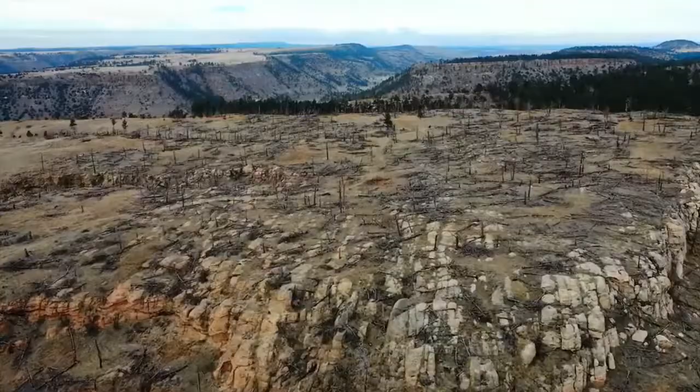The project FIT4REUSE aims at providing safe, sustainable and accepted ways of water supply for the Mediterranean basin by exploiting non-conventional water resources through innovative treatment technologies on the use of treated wastewater and desalinated water in agriculture and for aquifer recharge, adapted to the Mediterranean context and fulfilling legislative frame and market demands. Reclaimed water and desalinated water contribute to compensate the gap between agricultural water demand and supply and provide consistently high-quality water throughout the year.

FIT4REUSE technologies are developed in cooperation with stakeholders of the Mediterranean region and target practitioners, public administration, constructing companies and water operators through a concise business model, providing guidelines for practitioners and performing a holistic assessment of the use of non-conventional water resources to improve its public and legal acceptance.

The project FIT4REUSE is part of the PRIMA program, supported under Horizon 2020, the European Union's framework for research and innovation. It counts on 9 partners across 7 Mediterranean countries, consisting of universities, governmental organizations, water utilities and SMEs. Particularly, the project concentrates on the development of innovative, sustainable and competitive technologies for municipal wastewater treatment, desalination and brine treatment and disposal, simulation platform, irrigation.

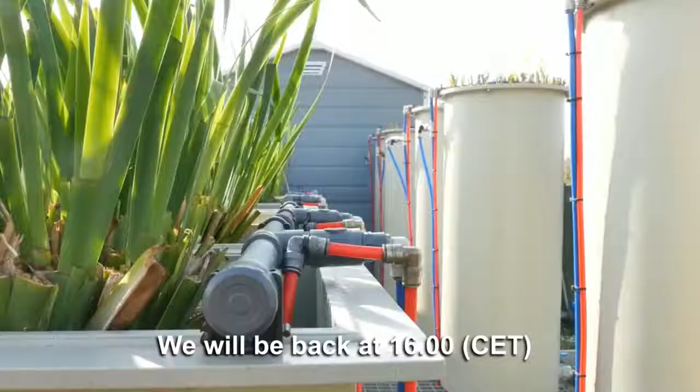The goal of the pilot plant in Granarolo dell'Emilia, Italy, is to optimize and enhance nature-based solutions for domestic wastewater treatment in order to produce an effluent that is suitable for reuse in agricultural irrigation. The pilot plant is located in a small municipality of the metropolitan city of Bologna, and it is intended for the secondary treatment of domestic wastewater through constructed wetland technology. It consists of 12 systems in total, 6 vertical flow constructed wetlands planted with Phragmites australis and 6 horizontal flow constructed wetlands planted with Iris pseudacorus.

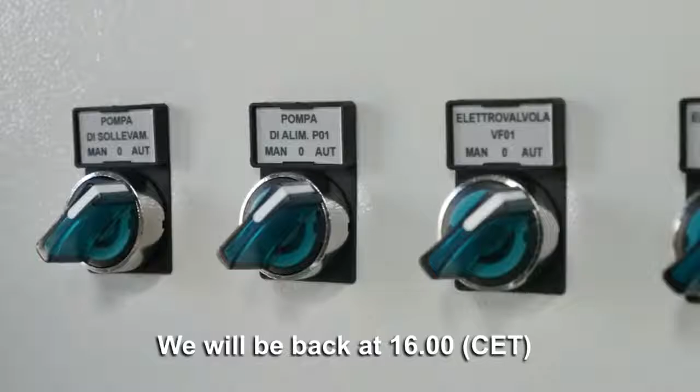These systems will test the contribution of different substrates to the treatment performance, also through their combination in series. Besides, researchers from the University of Bologna will test other operational parameters such as the effect of aeration, hydraulic loading rate and hydraulic retention time on the removal efficiencies of different contaminants present in wastewater. The pilot plant is fully automated and it will therefore allow a more complex monitoring, considerably increase reliability of results and reduce error probability.

The objective of the Greek pilot plant is to produce reclaimed water suitable for irrigation, European Class B or even better, by combining innovative nature-based solutions with nanotechnology. The pilot plant is located in the decentralized municipality of Antissa on the island of Lesbos. It consists of a vertical downflow bioelectrified wetland followed by a conventional sand filter, a novel nano-zero-valent iron column and an ultraviolet unit.

The bioelectrified wetland is an innovative solution for wastewater treatment that combines the advantages of microbial electrochemical technology with those of constructed wetlands, thus providing a number of benefits such as significantly lower land requirements and the potential for energy harvesting. The novelty is that the materials commonly used for wetland construction, such as gravel and sand, are replaced by electrically conductive materials such as coke, graphite and biochar that host electroactive bacteria.

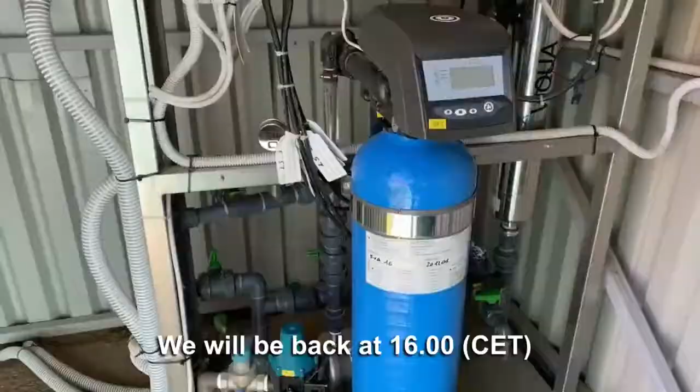Accordingly, nano-zero-valent iron is a powerful reagent with high efficiency for a wide spectrum of contaminants, both organic and inorganic. Its versatility is due to the fact that it can remove or immobilize the contaminants through various mechanisms, such as reduction, adsorption, or even oxidation through Fenton-type reactions. The integrated system has been set in operation and is routinely monitored in order to achieve optimum conditions, thus supporting the production of reclaimed water suitable for irrigation purposes.

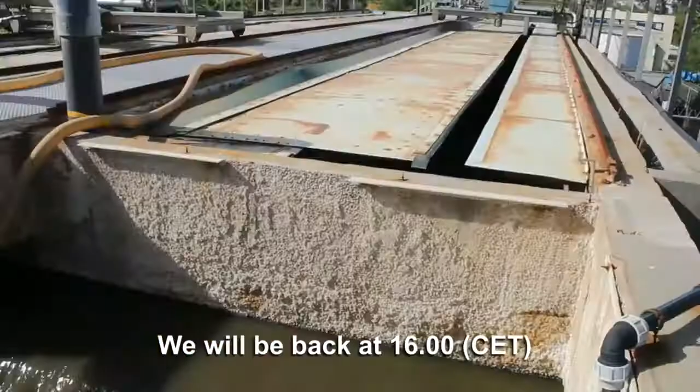Low-cost and energy-saving experimental wastewater treatment pilots have been designed and implemented separately or as integrated systems in relevant environment and run with real wastewater at relatively high flows. The pilot plant, using nature-based solutions as vertical and horizontal constructed wetlands for wastewater treatment, is located in Wastewater Treatment Plant El Menzah. Additional technologies will be combined and integrated in order to enhance the removal of pharmaceuticals, emerging pollutants and pathogens, and to recover nutrients and energy.

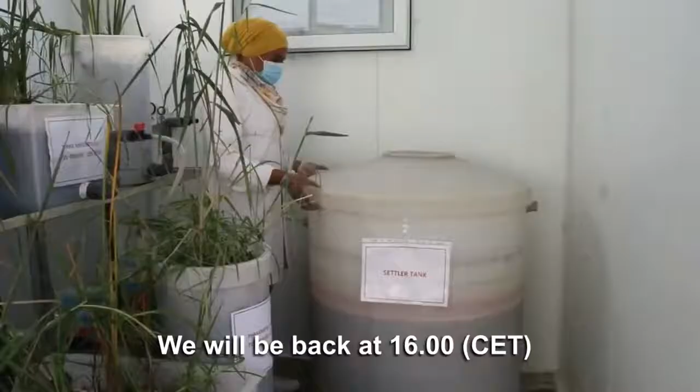Fixed bed adsorption using various inexpensive and natural adsorbents, clay, olive seed, date seed and perlite will be added before the discharge of wastewater in order to enhance the removal of pharmaceuticals and emerging pollutants, for example, bisphenol A and diclofenac. Ozone and UV irradiation technologies to remove pathogenic bacteria will also be assessed. A collection of plant growth promoting PGP bacteria was selected and will be integrated with constructed wetlands to remove micropollutants, diclofenac, bisphenol A.

The upflow anaerobic sludge blanket pilot, an anaerobic process for intensive wastewater treatment, is installed in wastewater treatment plant Chotrana. It is designed to be tested and started up with static biofilter as a pre-treatment stage for total suspended solids and chemical oxygen demand removal. It contains 2 tanks as conditioning tank and UASB reactor assembled as a closed-loop system. The reactor is equipped with an electric heating system to adjust the anaerobic tank at the desired temperature.

The treated wastewater is tested for field irrigation, and preliminary results showed that plant growth was comparable to that attained when drinking water was used without any noticeable adverse effect on the plants or the soil.

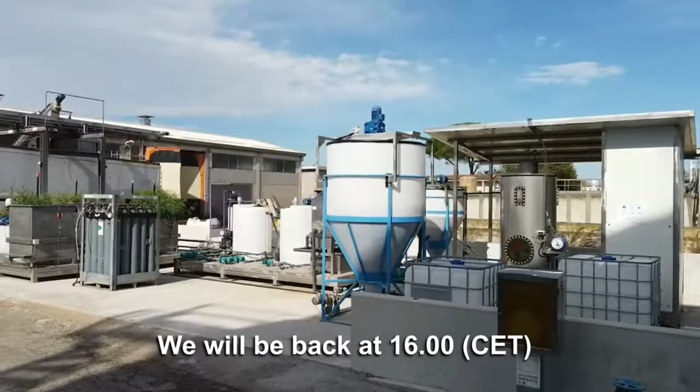The integrated pilot system, combining intensive and nature-based solutions for wastewater treatment, is located in Imola. The pilot activities will be performed on an existing experimental platform recently built within an Italian national project. In this way, the platform will also be exploited for additional and specific studies related to the FIT4REUSE objectives. It can test different combinations of upflow anaerobic sludge blanket, anaerobic membrane bioreactor, molecularly imprinted polymers, single or hybrid constructed wetlands, and ultraviolet disinfection unit.

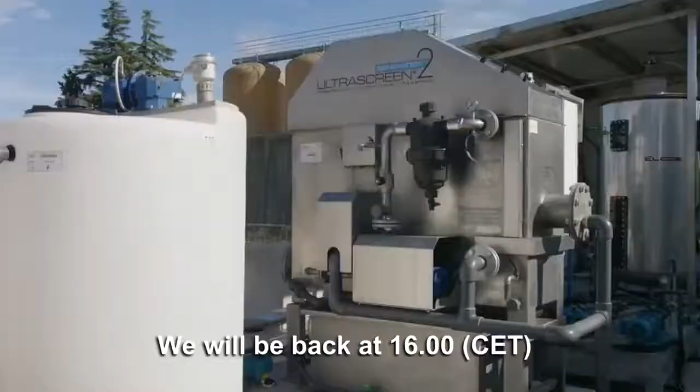These combinations will be used for treatment of real domestic wastewater with an occasional discharge of industrial effluent, and will aim to produce effluent that has a quality needed for irrigation of agricultural crops. Moreover, combining intensive and nature-based solutions is expected to reduce treatment costs, improve removal efficiencies, and make wastewater treatment process more sustainable. Upflow anaerobic sludge blanket can use organic matter to produce biogas, while constructed wetlands are low-cost technology able to further treat wastewater with low energy input.

The pilot plant has a central control unit, also accessible through an online platform, allowing everyday operation and monitoring of its functions. For example, flow rates, biogas production, and other operative parameters can be constantly monitored.

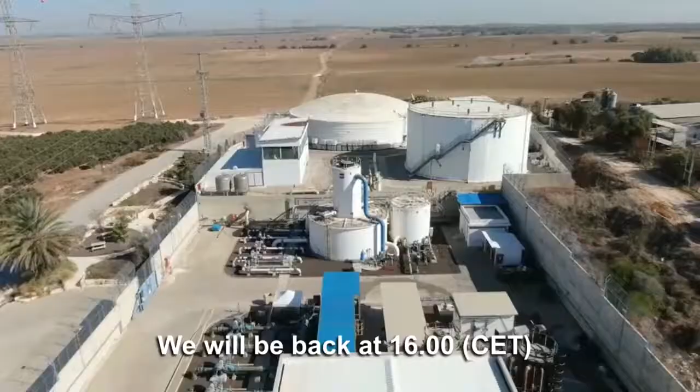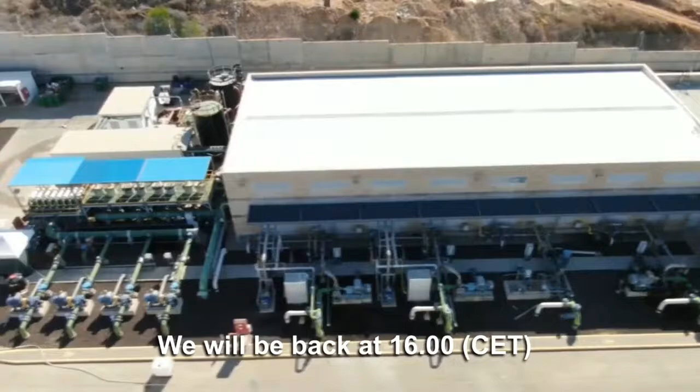Two pilot systems are operated by Mekorot at the Lahat brackish water desalination reverse osmosis plant within FIT4REUSE. The Lahat plant receives water from 24 different brackish water wells and is a part of a national rehabilitation project of Israel's coastal aquifer. The plant includes a pre-treatment stage of coarse and cartridge filtration, followed by 2 stages of reverse osmosis desalination. The pre-treatment design was done with the goal to preserve the reverse osmosis membranes and to prevent or slow down deposition of colloidal, organic and biological matter at the front of the pressure vessels.

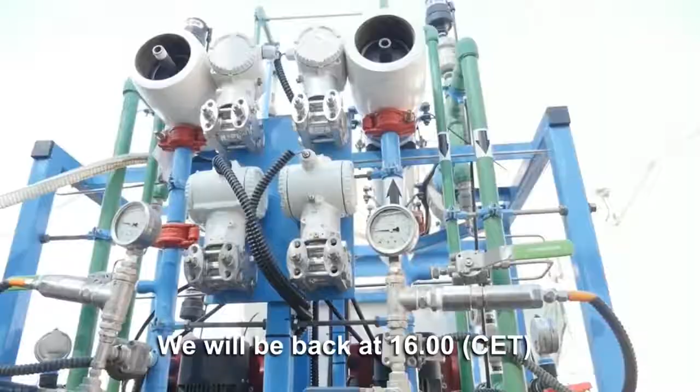The general objective of both pilots is to improve the reverse osmosis pre-treatment in an attempt to enhance the treatment performance, thus decrease energy and chemical consumption. Both pilots are monitored online, as well as daily by field measurements and periodically by lab sampling. The first pilot, Micronic Cartridge Filters pilot skid, is used to investigate different cartridge technologies. The pilot consists of 2 identical branches that are operated in parallel. Each branch includes a cartridge filter followed by a reverse osmosis membrane. The objective is to characterize various innovative cartridge filters in order to find the best one for the Lahat plant.

The second pilot, reverse osmosis desalination pilot plant, is used to investigate the fouling reduction device technology. The pilot includes cartridge pre-treatment followed by 2 stages of reverse osmosis desalination, simulating the commercial plant. 3 fouling reduction devices are installed externally to the piping prior to the cartridge filtration or reverse osmosis stages. The fouling reduction devices transmit an electric field into the pipe and the water, with the objective to improve flocculation capability as well as prevent precipitation of salts, organic and/or inorganic material and bacteria.

The desalination pilot plant is located at Isbat. It consists of an innovative desalination system combining nanofiltration and reverse osmosis. The pre-treatment module includes 5, 10 and 20 micron cartridge filters, an activated carbon column and injection of anti-scalant to remove impurities and prevent clogging.

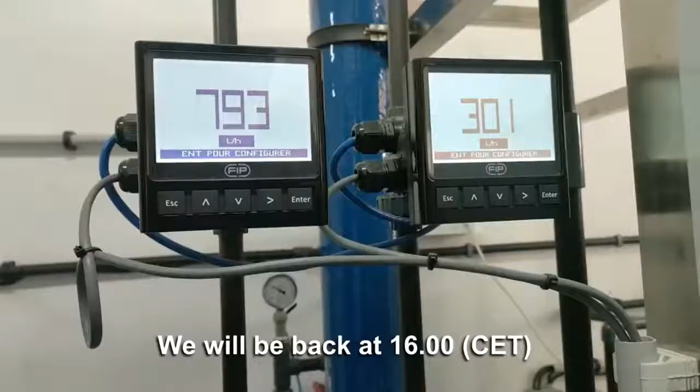The hybrid system of nanofiltration and reverse osmosis is expected to reduce energy requirements and improve the recovery rate of desalinated water. The brine was used to irrigate medicinal halophytes, salt-resistant plants. This will not only reduce the negative effect on the environment, but also contribute as an additional economic income to the system.

Also, solar energy was considered to cover the energy needs of the desalination pilot. The amount of 30-35 kilowatts daily produced was found enough to operate the hybrid system membrane unit.

FIT4REUSE simulation platform was designed to simulate simplified models of the FIT4REUSE solutions as a tool mainly for decision-making, suitable to simulate different scenarios for different cases. It enables users to perform dynamic simulations of nature-based and intensive resource recovery solutions regarding the choice of treatment options for different locations and wastewater sources around the Mediterranean region.

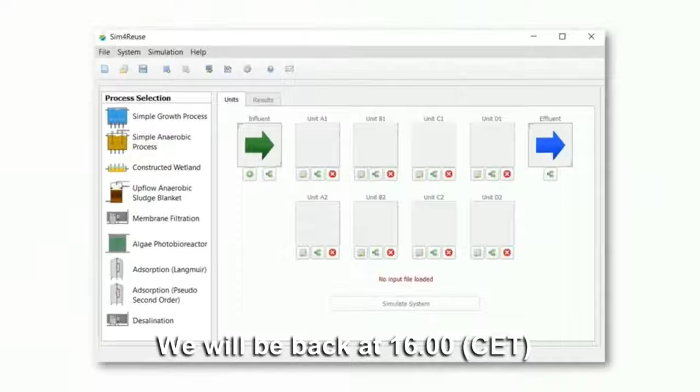The platform is capable of simulating single units as well as treatment trains with the innovative solutions of FIT4REUSE. It can be applied to continuously operated units with fluctuating pollutant inputs. The platform is also capable of calculating the reclaimed water quality, the energy costs and carbon emissions of each unit along the total system configuration, and therefore it is a powerful tool for possible energy savings and for preventing excessive carbon emission impacts.

Sanitary, environmental and agronomic risks related to water reuse, such as micropollutants or salinity issues, need to be quantified, managed and controlled. Also, the benefits related to water reuse need to be demonstrated and quantified on the field.

In FIT4REUSE, different types of flushing methods for drippers and different storage conditions are tested before irrigation of tomatoes and salads in controlled conditions. The tests carried out focus on irrigation management, aiming at answering the questions about the benefits of water reuse in terms of fertilization, how to deal with water quality evolution in open storage, and what are the best on-field solutions to limit drippers clogging.

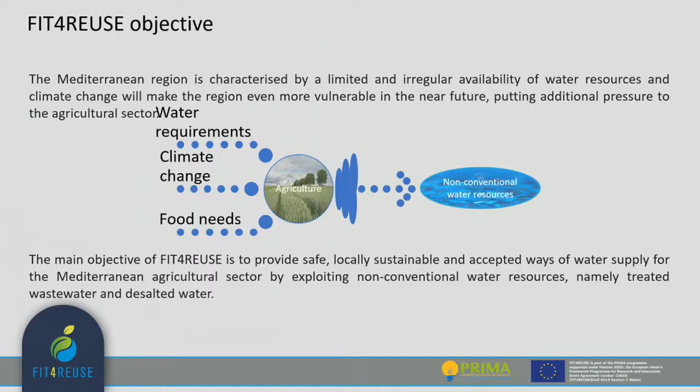Okay, good. The project Fit4Reuse, as you know now, is addressed to the safe use of non-conventional water resources in agriculture in the Mediterranean context. This means that we started from a key point: as Adriano Battilani also said before, the water requirements for agriculture are increasing. This increase is also due to climate change, but we also have to supply the right food, as food needs are also increasing.

From this statement at the beginning of our proposal, we understood that we had to work on the use of non-conventional water resources for agriculture, for irrigation purposes. These non-conventional water resources mean for us mainly treated wastewater, but also,

Sorry, something is happening in the presentation here. I don't know if online it is good or not, because something is not in good shape in the presentation.

But in any case, the Fit4Reuse consortium is made of 9 partners from 7 Mediterranean countries. We have partners from Italy, Spain, France, Tunisia, Greece, Israel, and Turkey. All the partners are here.

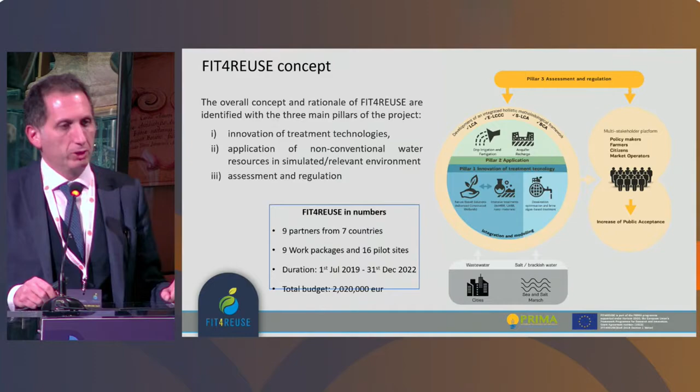main non-conventional waters in 3 main pillars, with the main goal to achieve innovation in treatment technology mainly, to achieve safe application of these non-conventional water resources in agriculture, in simulated or real relevant environment, and with the main goal to achieve a clear, holistic assessment of the use of these non-conventional water resources.

So to do this, within the Fit4Reuse project, we were able, first of all, to develop and build several pilot plants. So plants where all the innovations have been developed and tested at pilot scale. You will see that we will have about 15 or 16 pilot systems that have been developed in all the countries involved in the Fit4Reuse consortium, and this was the basis for our research.

Then we would like to achieve the possibility to replicate what we have developed and the results of what we have found at our pilot scale activities. To do this, we developed a simulation platform that you will see later in our presentation. This simulation platform is able to combine and simulate the performance of all the developed solutions we have tested at pilot scale. So this is a very powerful tool for replication of these results in other contexts, in other countries, with the same problems and issues.

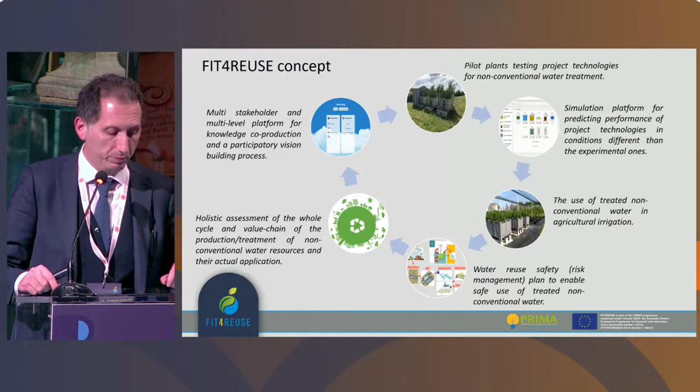was developed. And these are the main aspects that we developed within the FIT4REUSE project, and all these aspects have been grouped in three main pillars. Today, we will see pillar number one. Pillar number one was addressed to the innovation, to the treatment solutions, to the desalination solutions, able to achieve the quality of water to be used in agriculture, but also able to achieve this result with less cost and in a safer manner. And we will see this today.

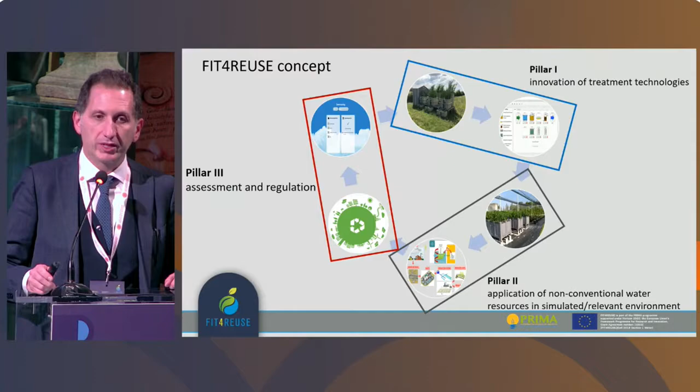Tomorrow, we will see pillar number two, addressed to the application of the non-conventional water in agriculture. And tomorrow afternoon, pillar number three, where the assessment, regulation, and increasing public acceptance is the main goal. So here you can see a few pictures related to the work you will see in detail just after my presentation related to pillar number one. So it is an example of the pilot activities, the pilot plant that was built and used during our research activity, as well as a picture of the simulation platform, so pillar number one.

And here you can see both the irrigation schemes used for the testing of application of treated wastewater in France and in Italy, as well as the methodological concept for the water reuse risk safety planning. And then something about pillar number three that you will see tomorrow afternoon, related to this new innovative approach for the holistic assessment of all of this. So I hope that now you will enjoy the presentation related to the results.

Luigi, you can start. Okay, thank you for your kind introduction. I would like to thank also Professor Attilio Toscano for inviting me for this talk. Unfortunately, I cannot attend personally because I'm affected by COVID right now. And I would also like to thank the organizing committee for supporting me in this presentation.

So my talk is related to the tertiary treatment of urban wastewater. I will introduce briefly some results from our PRIMA project named DSWAP about the solar Fenton process. So this is the framework of my presentation. I will briefly introduce the main challenges in tertiary treatment of urban wastewater. I will also spend some words about the new EU regulation on wastewater reuse. Then I will introduce the state-of-the-art of tertiary treatment of urban wastewater. And in particular, I will talk about solar Fenton, which is the process that we have been investigating in this project. And finally, I will introduce some results from our project.

So as I told, the main challenges in tertiary treatment of urban wastewater are different. For sure, one of the main challenges is disinfection and disinfection byproducts. So in order to reuse wastewater, one of the more stringent limits are related to pathogen inactivation. And so disinfection should be really effective in order to make the effluents in compliance with such limits. For example, according to the new European regulation, the limit for E. coli is really stringent for Class A water, which is 10 colony-forming units per 100 milliliters.

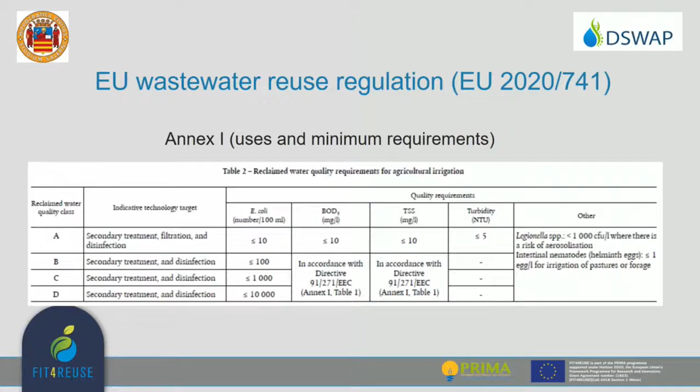So I briefly introduced the EU wastewater reuse regulation and the table, and this table is really important because it sets the main limits for E. coli, BOD5, total suspended solids, and turbidity for different reclaimed water quality classes. So as you can see, for the top class, the A class, the limit for E. coli is really stringent, so below 10 colony-forming units per 100 milliliters.

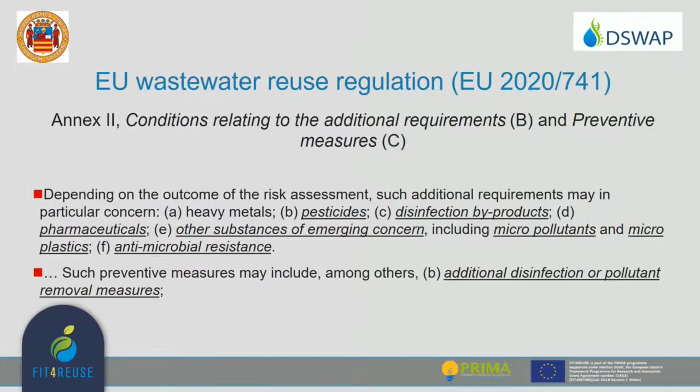For example, conventional sand filtration is designed for the removal of suspended solids, so it is not effective at all in removing contaminants of emerging concern, nor in the disinfection of wastewater. Activated carbon adsorption is really effective in the removal of contaminants of emerging concern, and is used in Switzerland and in Germany for this purpose, but is poorly effective as a disinfection process. So if we have to reuse wastewater, we have to couple adsorption on activated carbon to a disinfection process.

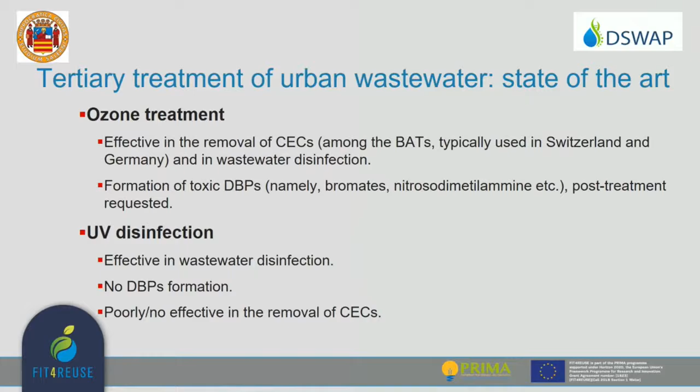Ozone treatment is also among the best available technologies for the removal of contaminants of emerging concern, and it is also used in Switzerland and Germany. But unfortunately, this process forms toxic disinfection byproducts, so a post-treatment is needed. UV disinfection, we know, is really effective in the disinfection of wastewater and does not result in the formation of toxic disinfection byproducts, but is poorly or not effective at all in the removal of contaminants of emerging concern.

Conventional chemical disinfection processes such as chlorination, for example, are effective in wastewater disinfection, but unfortunately result in the formation of toxic disinfection byproducts such as trihalomethanes and haloacetic acids, and are not effective in the removal of most contaminants of emerging concern.

A new disinfection process that is recently used in different wastewater treatment plants to replace chlorination is peracetic acid disinfection. This is effective as a disinfection, does not result in the formation of known or regulated disinfection byproducts, but is also poorly effective in the removal of contaminants of emerging concern.

Therefore, in the last years, different processes have been investigated as alternative to this conventional tertiary treatment. Among these, photo-driven advanced oxidation processes have been extensively investigated, with good results in terms of disinfection and removal of contaminants of emerging concern. This process relies on the formation of radical species that can effectively remove contaminants of emerging concern, as well as inactivate pathogens.

Despite they do not form known or regulated disinfection byproducts, they can form toxic intermediate products. Therefore, toxicity should be checked during the process. Moreover, among these, one of the most effective processes is the Fenton and photo-Fenton process, and this is a really attractive option for small wastewater treatment plants because UV radiation can be replaced by solar radiation, thus resulting in really interesting results for tertiary treatment of urban wastewater.

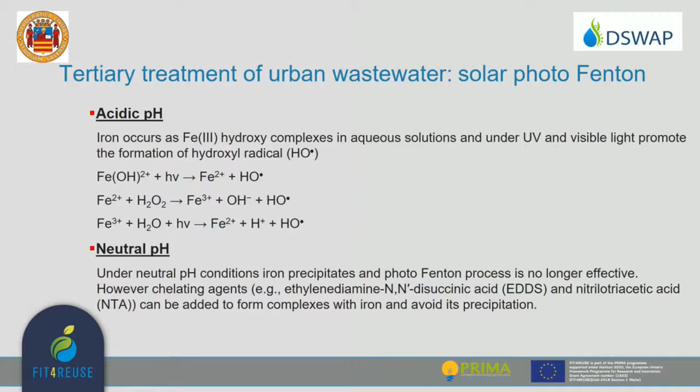In the last years, a new approach has been investigated, which is the use of so-called chelating agents that can form complexes with iron, thus making the process effective even at neutral pH. And this is the approach that we follow within the DSWAP project, decision support-based approach for sustainable water reuse application in agricultural production, funded by the PRIMA agency. The main goal of the project is to develop a modular, cost and energy efficient wastewater treatment system specifically designed for wastewater reuse in the context of crop irrigation.

It is a multidisciplinary consortium, which includes 10 beneficiary partners, among which 7 university research centers and 3 private industrial enterprises from 7 countries, Israel, Cyprus, Germany, Italy, France, and Portugal, including different backgrounds and expertise such as environmental engineering, chemistry, microbiology, molecular biology, plant physiology, and risk assessment. So the project was funded with a budget of 2 million euros and this year. So in these 2 last slides, I will show you some results from our project.

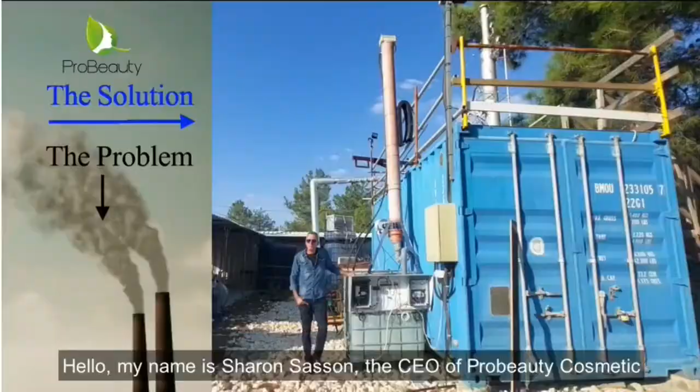Hello, thank you. My name is Sharon Sasson, the CEO of ProBeauty Cosmetics. Industrial gases bear negative effect either directly through NOx and SOx emissions that negatively affect human health and indirectly through greenhouse gas emission that motivated global climate changes. Photosynthetic microorganisms such as algae and cyanobacteria are capable of assimilating both hazardous gas and carbon dioxide in a simple and cost-effective manner.

The simple, innovative tubular PBR, which you see here, is the fourth R&D stage of system capable of assimilating nutrients from both aquatic and gas phases, which enable simultaneous treatment of aquatic and gaseous industrial effluents. Aquatic effluent enters from the top and gas is introduced from its lower part and flows out from its top. In between, the water is flowing over and through subvertical mats that are the habitat for the photosynthetic biomass that is accumulated in the siphon below the reactor. By using a red and blue LED array, we can maximize the photosynthesis process. The water can be re-entering the PBR in a closed recycling system.

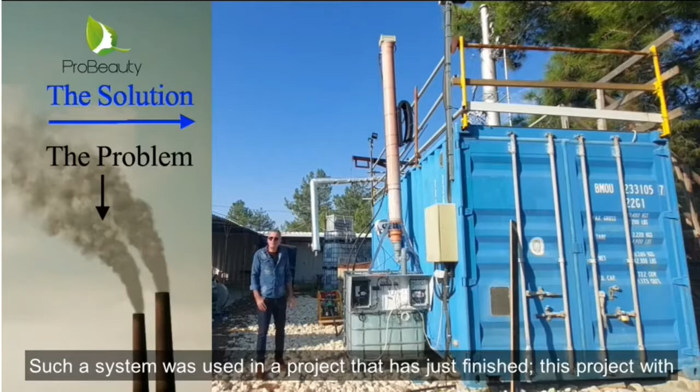A biomass produced has a commercial value, depending on the type of treated material. A dirty matrix will produce biomass suitable for energy production or fertilizers, with revenue of a few dollars per kilogram. And a very clean matrix may produce biomass suitable for food and pharma industries, with revenue as high as hundreds of dollars per kilogram. The previous generation that you can see behind me is a type of a greenhouse PBR, in which the LED light supplemented sunlight. Such a system was used in a project that has just finished. This project with Mekorot was aimed to reduce nitrogen concentration in desalination brine.

The new PBR, if compared to a greenhouse type PBR or other existing PBR, is suitable for application in industrial environment with much higher area utilization output ratio. Our vision is to deliver a cluster of PBR assembled in 40-feet container that will replace industrial chimney either on land or in the sea installed on ships, which can assimilate hazards and greenhouse gases into algae biomass bearing a commercial value. The new approach may be regarded as an integrated pollution prevention and control system, or as we wish to market it, as a bio-IPPC system. This project was already supported by the Israeli Innovation Authority for water repolishing application, and it's now pending an Israeli Ministry of Energy grant for carbon dioxide assimilation. Thank you for listening. I hope it will contribute to our mission to reduce greenhouse gases emission worldwide.

Hello. My name is Georgia Stefanakou. I am the Executive Director of Major Projects of Athens Water Supply and Sewerage Company, EYDAP. I would like to thank the coordinators of FIT4REUSE, the National Technical University of Athens, and Dr. Simos Malamis for the invitation to speak at the Water Reuse Day. It's a special pleasure for me to participate in the events of the project FIT4REUSE.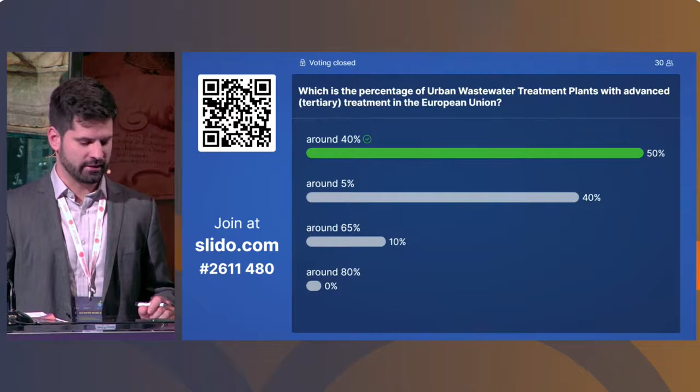All right, so most of the people voted for around 40%. Before I reveal the correct answer, let me say that according to the European Environment Agency, in 2007 it was around 20%. The latest data that we have is for 2018, and most of the people were correct. Please show the results. So it is around 41% of the wastewater treatment plants that are equipped with tertiary treatment. Perhaps as an interesting note, most of those treatments are sand filtration and microfiltration. All right, this was a successful question. Let's see if you can get the second one.

So please, if you can proceed to the second question, which is, how much desalinated water is produced every day worldwide? Again, we keep around a minute of time. This is not easy to Google, so the options are 3,000 cubic meters, 200,000 cubic meters, 95 million cubic meters, or 700 million cubic meters.

Some more time to... I'm not sure if anyone submitted the vote yet, which means that everyone is actually searching online. This takes too long. Go wild. All right, when Sarit votes, then I will close the poll. The poll was closed, all right.

So most of the people guessed 95 million cubic meters. So before revealing the result, again, for 2018, the United Nations conducted a study. They reported there are around 16,000 operational desalination plants that produce 95 million cubic meters of desalinated water for human use per day. In addition, around half of this amount is produced in the Middle East

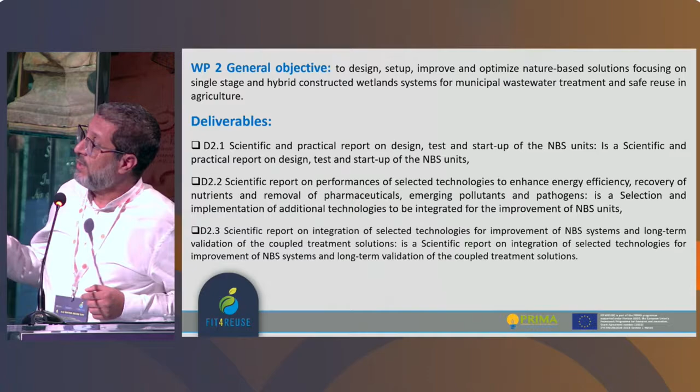This work package allowed the presentation of 3 deliverables, mainly 3 main activities. The first one is about the design, test, and startup of pilots. The second one is about selected technologies to enhance the treatment. And the third one is the integration of the technologies and the long-term validation of the results.

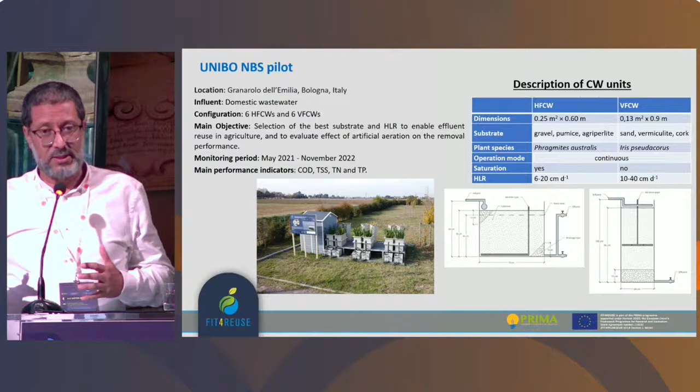Let's start with the first pilot, which is located in Granarolo dell'Emilia, Bologna, in Italy. It is mainly constituted of vertical and horizontal constructed wetlands with different substrates, with 2 different plant species, operated continuously, sometimes saturated, sometimes not, and with different hydraulic load rates.

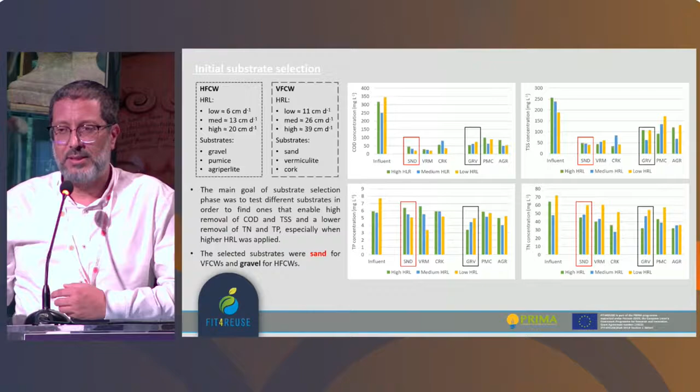So at the end of the different experiments, this first pilot allowed the main results about COD removal and total suspended solids removal, which are the main pollutants or parameters to be followed in the system. And the idea is also to maintain some high content of nitrogen and phosphorus, which can be recycled in irrigation.

So at the end of this first set of experiments, the substrate was chosen as sand for the vertical constructed wetlands and gravel for horizontal ones. Sorry. So the system was then conducted as an integrated system, horizontal-vertical and vertical-horizontal.

This combination allowed high removal of COD and medium removal of total nitrogen, as expected. The second remark is about the removal of total suspended solids and total phosphorus, which were mainly removed during the first stage of the system.

The technology of aeration of these systems was tested, but there is no big difference in the results, so we maintained the system without any further aeration, for energy reasons, of course. And this is mainly for the vertical ones, which are unsaturated systems.

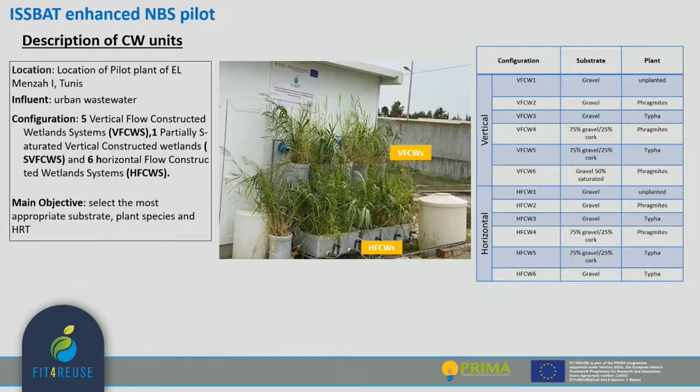The second pilot is in Tunisia, and in this set of experiments we were working with different configurations, also vertical and horizontal. We also changed plants, about 2 plants, and the substrate, gravel with addition of cork or other material in different proportions, and also with unplanted systems. So we had 6 horizontal and 6 vertical systems operated separately.

And here are the results, and mainly we can conclude that with mixed substrate, let's say gravel with cork, we have the best results in terms of removal of pollutants. We need about 30 hours to remove the maximum of COD. If we want to remove nitrogen, we need a little bit more time, about 48 hours to achieve the removal of nitrogen.

Different additional technologies were developed or tested. Let's say about disinfection using UV and using ozonation. The technology of addition of adsorbents to remove some emerging pollutants, namely bisphenol A and diclofenac.

We tested also the addition of what we call plant growth promoting bacteria. A first selection of about 12 strains able to grow in presence of the emerging pollutant bisphenol A, but we chose to add only 3 strains that showed capacity to remove bisphenol A. Also, the use of photovoltaic panels to give power for the pumps and other devices of the system.

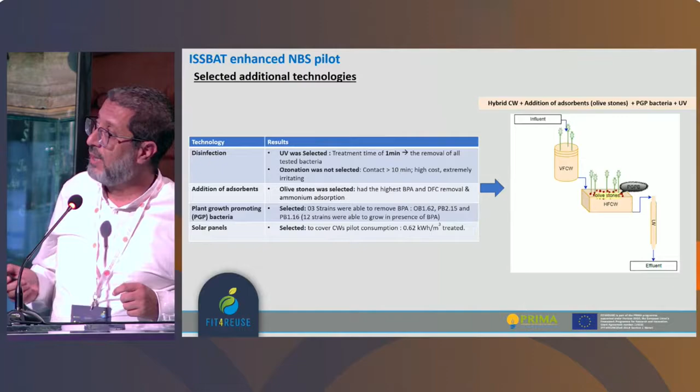So an integrated system composed of vertical flow constructed wetland, horizontal flow, and UV disinfection was installed with the use of gravel and cork and olive stones as adsorbent for micropollutants. Also, we chose to add these bacteria, the 3 strains of pre-selected bacteria. So we had 4 lines of treatment, vertical and horizontal, with and without PGPR, with and without disinfection, and with and without olive stones.

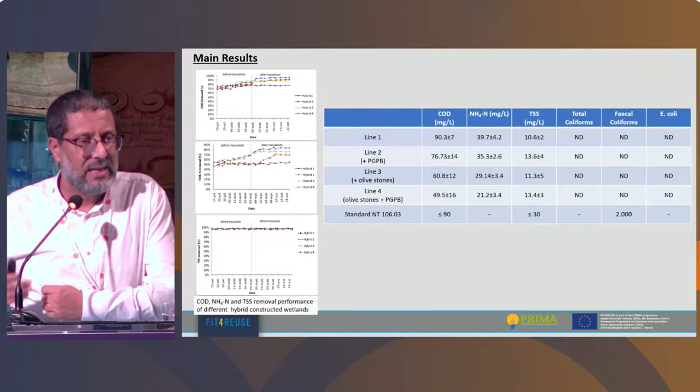These are the operating conditions applied. Finally, we find that the addition of PGP enhances the removal of pollutants, and we had a high level of COD removal, but also of emerging pollutants and nitrogen. And this is mainly by indirect effect of PGP. When we try these bacteria directly to remove nitrogen, we don't find good results, but combined with the plants, we have some good results.

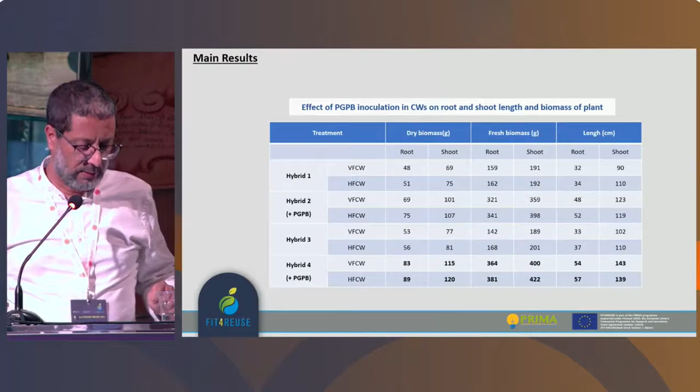Let's move to the third pilot. The third pilot is located in Antissa village on Lesbos Island in Greece. The main objective was to remove biodegradable COD, soluble COD, and part of the total nitrogen, not the total amount of nitrogen. The system was operated for almost 1 year and a half, and different parameters were followed. The innovation here is that the filling material is an electroconductive biofilter.

Please try to close up so that we can follow. In 1 minute I finish.

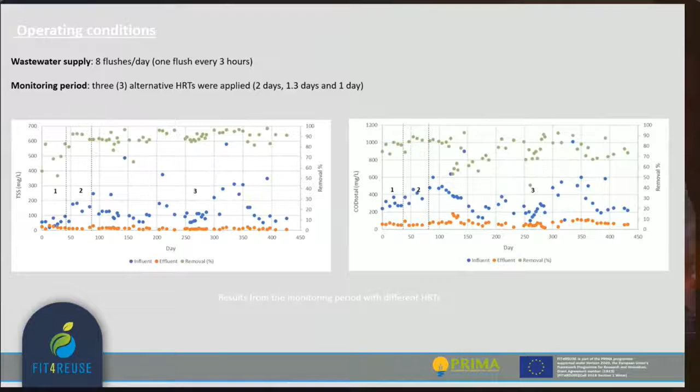Great. So the innovation here is the use of an electroconductive biofilter colonized by electroactive bacteria. The system was operated at 3 different hydraulic retention times, and the system achieved the target removal efficiencies with high removal of TSS, COD, BOD, and about 10% removal of nitrogen and phosphorus. Moreover, we have 2-log removal of bacteria, and the system was able to remove a huge part of emerging pollutants.

So some further work has to be done regarding the reduction of surface requirement, the characterization of microbial communities in wetlands, and the evaluation of performances when we decrease the hydraulic retention time. And thank you.

Thank you very much. Coupled UASB and anaerobic MBR. With respect to nutrients removal, the system was not able to remove them efficiently, also showing an increase in the concentration of their soluble forms. However, the reclaimed wastewater stream was appropriate for fertigation in terms of nutrients, suspended solids, organic matter, and pathogens.

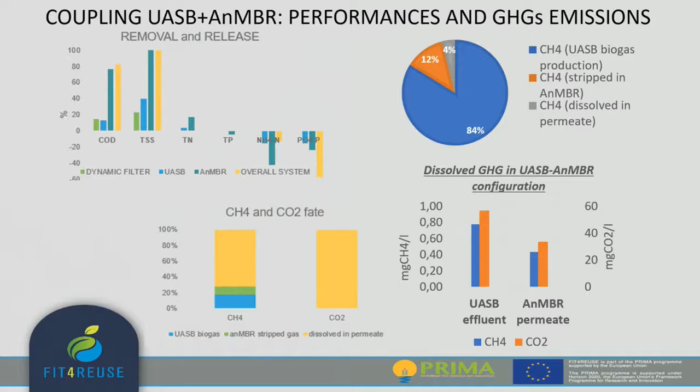Moreover, the carbon footprint in terms of methane and carbon dioxide showed the primary role of gas purging in the membrane for stripping dissolved methane in the UASB effluent. Also, if both direct and indirect emissions are considered, this coupling system could reduce CO2, methane, and nitrous oxide by 70%, 50%, and 100% respectively, compared to conventional activated sludge.

Another important issue is the presence of micropollutants in wastewater. The first technology for their elimination is molecularly imprinted polymers by UniVPM partner. These materials have cavities in the polymer matrix with an affinity for a chosen target molecule, which in our case is the pharmaceutical diclofenac. As such, they are analogs of natural antibody-antigen systems.

The material was synthesized through bulk polymerization, and according to scanning electron microscopy and Brunauer-Emmett-Teller surface area analysis, the successful synthesis was confirmed. Molecularly imprinted polymers had a higher pore volume and higher surface area than non-imprinted polymers. Also, batch adsorption tests showed higher affinity to diclofenac with an imprinting factor of approximately 2 and a good correlation with the Langmuir model.

Successively, MIP is used as a filler material in a fixed bed column in tertiary treatment after the anaerobic MBR. Diclofenac compound was spiked in the influent wastewater at a concentration of 0.5 milligrams per liter, and 2 trials made with a different percent of MIPs inside the column, 33% in one case and 100% in the other.

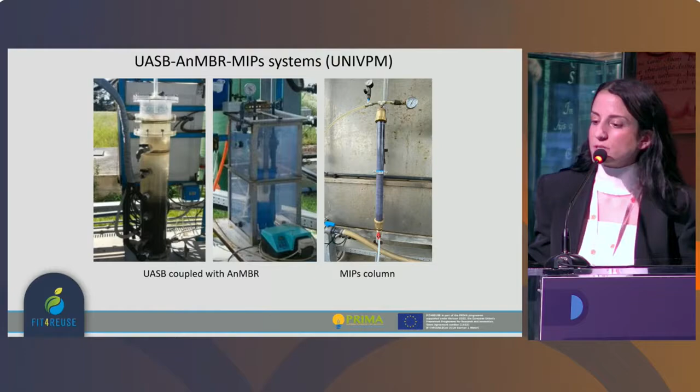And the summary of the UniVPM treatment train, which includes an optional dynamic filtration with up to 50% removal of TSS, the coupling of UASB and anaerobic MBR with high removal of COD, TSS, nutrients release, disinfection, and biogas production, an optional UV disinfection with up to 75% removal of Escherichia coli, E. coli, at a dose of 35 millijoules per square centimeter, and up to 50% removal of diclofenac by MIPs at a contact time of 30 minutes. The effluent wastewater stream complies with Class A quality standard according to the European regulation for water reuse.

However, anaerobic processes could not remove nutrients, so our partners from UNIBO developed an ion exchange system, not only for the removal, but also for the recovery of nitrogen and phosphorus. The first step was to select the most promising sorbents through adsorption isotherm batch tests. Geopolymer G13 was selected for nitrogen, while calcined pyroaurite was selected for phosphorus. Then the sorbents were tested through continuous flow breakthrough tests, and in the last step, an optimization was carried out in terms of empty bed contact time of the adsorption and the desorption step, and the choice of the most appropriate desorbing solution. A fraction desorbing solution with potassium chloride and potassium nitrate for nitrogen, and a solution of sodium hydroxide 2% for phosphorus.

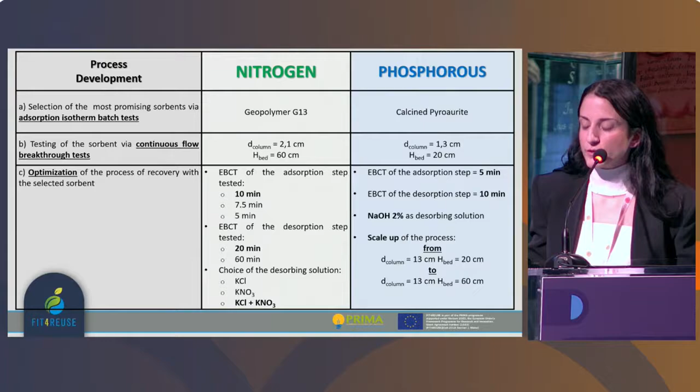The pilot plant is characterized by a high level of automatization, simulating a full-scale application. It consists of a microfiltration unit, the adsorption ion exchange column, several tanks, one volumetric membrane pump, monitoring sensors, one PLC unit, a data logger, electrically operated valves, and one automatic sampler.

For nitrogen, the empty bed contact time for the adsorption step was 10 minutes and 20 minutes for the desorption step. The adsorption yielded breakpoint was 96%, while the operating capacity was 8.42 milligrams nitrogen per gram of dry adsorbent. The fraction desorption achieved high separation of nitrogen, while the material was stable for 7 repeated breakthrough tests.

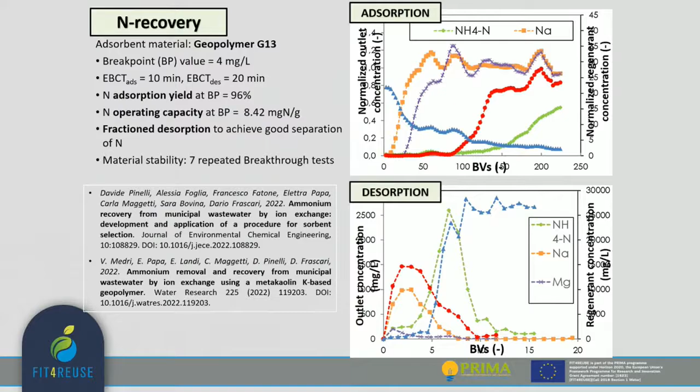For phosphorus, the empty bed contact time of the adsorption step was 5 minutes and 10 minutes for the desorption step. The adsorption yielded breakpoint was also very high, and the operating capacity was 7.6 milligrams phosphorus per gram of dry adsorbent. The material was stable for 5 repeated cycles, and when the process scaled up from a lab-scale plant with a bed height of 20 centimeters to a pilot plant with a bed height of 60 centimeters, a larger volume could be treated in one cycle.

The last technology is the nano-zero-valent iron column system by NTUA. NZVI was incorporated into the pores of a strongly acidic cation exchange resin by an environmentally friendly method. According to this method, trivalent iron was adsorbed into the resin and then reduced to the elemental state by the action of polyphenols contained in green tea extracts. The target was to remove selected micropollutants from the endocrine disruptors category and non-steroidal anti-inflammatory drugs group, and selected heavy metals from treated wastewater. The system's flow rate was 26 liters per day, and the contact time was selected to be 2 minutes after a series of tests, which corresponds to an empty bed contact time of 11 minutes.

Also, the system includes a persulfate solution with a concentration of 1 millimolar and a flow rate of 1.2 liters per day. This addition had the aim to generate radicals for oxidation, and pH adjusted to acidic values in the influent matrix and readjusted to alkaline values at the effluent. Under the long-term performance of the system, it was confirmed that it could remove at higher removal rates naproxen and diclofenac and bisphenol A when tertiary treated wastewater from a conventional aerobic system was used. And this could be attributed to a synergy of mechanisms like oxidation by radicals, adsorption, and reduction.

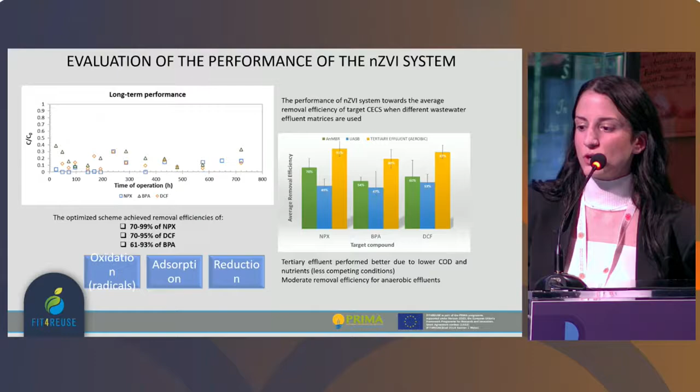Okay. Also, the system was evaluated through different wastewater matrices, UASB effluent, anaerobic MBR effluent, and the tertiary effluent from the conventional aerobic system. And it performed better for the tertiary effluent due to lower COD and nutrients, which led to a less competing environment. It also removed heavy metals like hexavalent chromium and arsenic at very high rates, and E. coli in the range of 1 to 3 logs, depending on the influent load.

To conclude, anaerobic systems like UASB and anaerobic MBR can effectively remove BOD5, COD and TSS while they require low energy. Also, the coupling of anaerobic MBR and UASB has lower carbon footprint compared to conventional activated sludge. Ion exchange processes for removal and recovery of nutrients can take place through geopolymer 13 for nitrogen and calcinated pyroaurite for phosphorus.

In terms of the new directive for wastewater treatment of the European Union, micropollutants can efficiently be removed by molecular imprinted polymers and nano-zero-valent iron. And also, nano-zero-valent iron is a very promising technology for the removal of selected heavy metals. Thank you.

Thank you, Evridiki. I know as a fact that she could speak the whole day about those technologies and that she tried really to squeeze as much information as possible into the presentation, but that's that.

During the speech, she already mentioned, in fact, that some of the technologies could be coupled with nature-based solutions, and this will now be a presentation actually showing potential coupling of nature-based and intensive solutions in the same treatment train. I invite Francesco Fatone, a professor of chemical and environmental engineering of the University of Marche, and a vision leadership team member at Water Europe, to close the block of those presentations, please.

The pointer is there. Well, and of course, thanks Attilio for all this coordination, and thanks Stevo very much for the operational coordination of this very nice project. Finally, it was great to collaborate together. Stevo asked me to be shorter than expected. It will be very difficult, so please tell me when I'm missing 3 minutes. You know, I'm going longer than usual, so just let me know. I told Stevo, not Attilio, please. So, yeah. I wanted to keep the attention alive. That's because it's a bit late.

So, yeah, we demonstrated 3 possible integrations. And these were carried out in Italy, in Greece, and Tunisia, so as to cover the different areas of the Mediterranean basin. Let's start with the Italian one. This is located in Imola, in a treatment plant that is operated by the local utility HERA, and the plant was actually built by Conforteco.

In another project, it was integrated within FIT4REUSE in order to get this synergistic effect of the anaerobic system, that is highly important, especially in this period of energy crisis, to recover energy for the removal of organic carbon, together with the anaerobic membrane bioreactor to evaluate the possible high-level water reuse. And then this was followed by different schemes of constructed wetland that were operated by the group of Attilio, of course. So all this was operated for several months, and as you can see, the pilot scale was quite relevant.

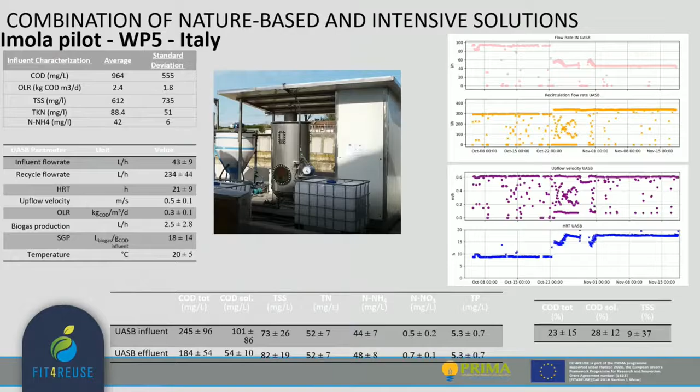So as you can see here, we have results. Actually, what we tested here is low temperature anaerobic treatment. The reactor was operating for most of the time below 20 degrees. That was our challenge, because we wanted also to see if we can operate the anaerobic reactor in our climate, in our temperature. And as you can see here, the HRT of the reactor was more or less from 10 to 15 hours. At the beginning, we wanted to go even below this value. And the flow rate was quite relevant. We were struggling a bit for the best setup of this reactor in the real environment.

And as you can see, the COD is very high. Why? Because this plant is also treating septic tanks. The recycle is going to the headworks. So the lesson learned, the take-home message, is when you have an anaerobic reactor, be careful about the different flows that are going there, about the different recycles. Now we know very well, after several weeks and months of struggling there. And many thanks also to Giuseppe, who was struggling manually in the operation of the plant, together with the chair that is also in this room.

Well, this is the membrane part. As you can see here, the membrane was a side-stream membrane that was able to achieve, as expected, the Class A quality for water reuse. So almost complete removal of solids with log reduction that was as expected.

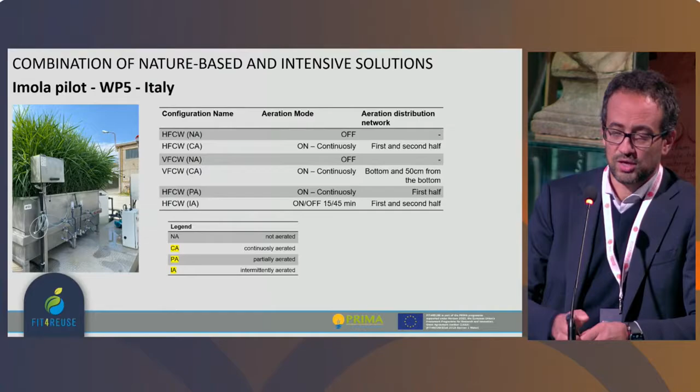But well, I think the most important results were coming from the combination of anaerobic and constructed wetland. Why? Because anaerobic treatment at that temperature was only removing around 30% of the COD, so enough to get some reduction of energy footprint, but the combination with the energy-efficient nature-based solution was successful.

As you can see here, we have different aeration modes that were tested by the group of Attilio here in Bologna, and the results are quite interesting because thanks to this combination, we were able to achieve very good effluent quality in terms of organic carbon, but also in terms of nutrients.

Aeration mode was found to be very relevant, and it's also interesting to see how intermittent aeration can also have a relevant effect on the combined removal and wastewater quality, even to control the possible fertigation, where we might need to have more or less nutrient in the effluent. So here you have more data, but I have to be quick. Slides are available anyway.

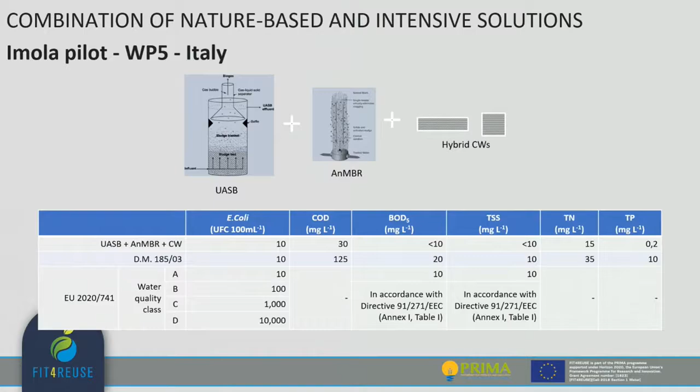And finally, the combination of these systems. If we combine anaerobic system for the energy-efficient energy recovery, also removal of COD, together with the membrane, together with different constructed wetland, you can see we can, of course, achieve the Class A water reuse quality. And in addition, we are also aligned with the current regulation for water reuse. So the challenge is to avoid the membrane probably here, and we will see this potential in the following part, that is the Tunisian treatment train that will be presented later.

What we did in Greece? Well, in Greece we are working in Antissa, in Lesbos Island, and the main innovation here was the combination of a bioelectrified wetland that was combined with sand filtration, nano zero-valent iron, and UV disinfection. Here you can see the train that was, even in this case, treating a few cubic meters per day. And the main objective that was achieved finally was Class B or Class A water reuse quality.

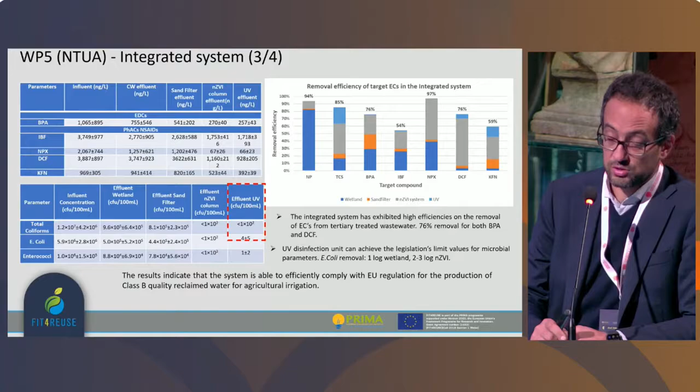Here you can see the set of analysis that was done to verify the potential of this train to remove emerging contaminants. That is an important topic under discussion. And finally, we were able to get results in terms of pathogens. As you can see, we were able to achieve the Class B water quality for water reuse, but the potential can be increased by upgrading the disinfection. So the main challenge here was the upgrade of the final disinfection.

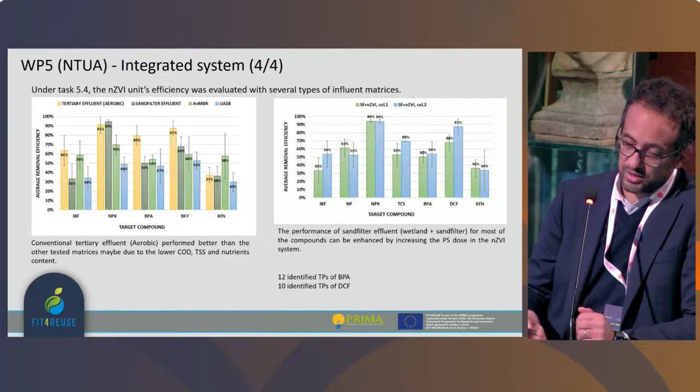Still, we had a lot of investigation to validate the nano zero-valent iron in terms of micropollutants removal. And as you can see, the performances were quite surprising to us, because the conventional tertiary effluent performed better than the other matrices, probably due to different COD and TSS. But finally, we were also able to identify some transformation products, and our target compounds were bisphenol A and diclofenac, as we did also for the treatment train that was presented before, together with the molecular imprinted polymers.

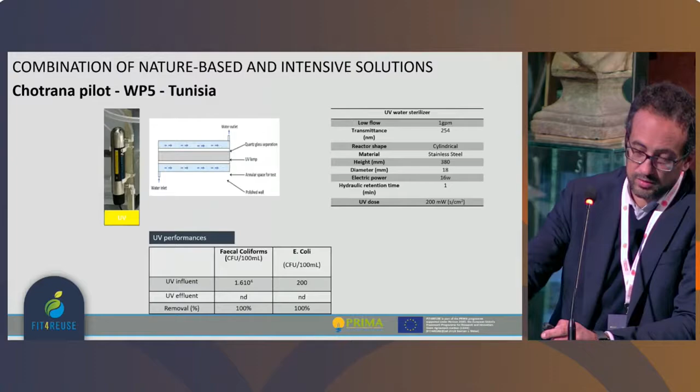Well, the disinfection is quite a conventional plant, and as you can see, by operating this carefully, we can easily achieve class B according to the European standard. So here you will see the full train, and finally the water quality was successful thanks to this integration.

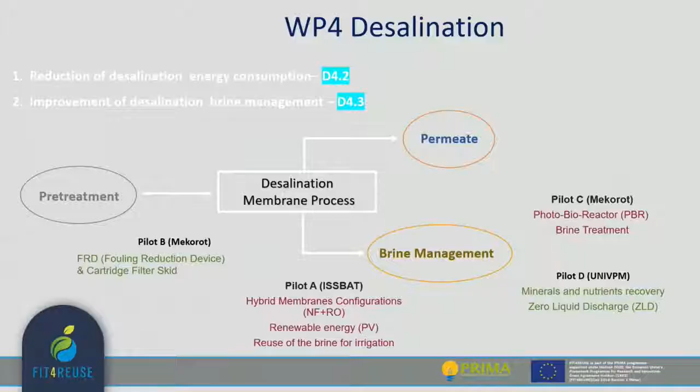So again, I'm Sarit from Mekorot, from the desalination division. In this presentation, I want to show you the main results obtained with the 4 pilots that operated as part of work package 4, the desalination work package, which mainly focused on environmental improvement in the desalination process. In this slide, you can see that these 4 pilots were integrated along the desalination process. The main goals of these pilots were to reduce the energy consumption of the desalination process and to improve brine management.

We'll start with pilot A, the ISSBAT pilot, which is located in Tunisia and aimed to reduce energy consumption by using a hybrid configuration of NF and RO membranes, and also to use clean, renewable photovoltaic cells. Regarding brine management, the brine is used to irrigate different types of aloe vera. In this slide, you can see the scheme of the ISSBAT pilot, which consists of 3 parts.

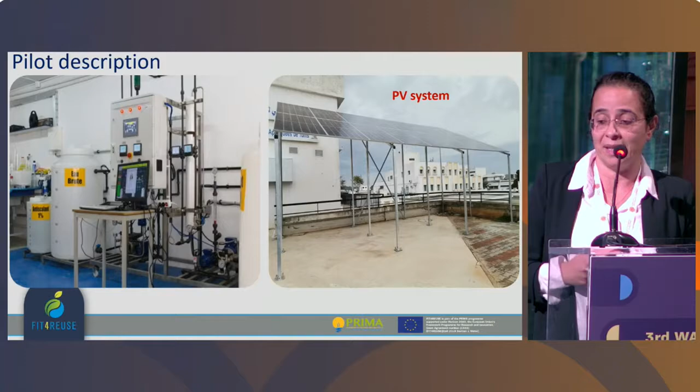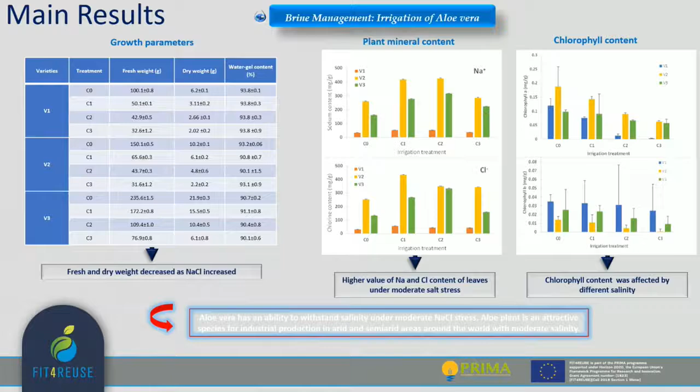the control. These results indicated that the growth parameters in terms of fresh weight and dry weight decrease as the salt concentration of the brine increases. The same holds for the plant mineral content and chlorophyll content results, together with the growth parameters. From this result, we can conclude that the aloe vera types can be irrigated with brine of moderate salinity.

So to conclude this pilot, the main conclusion is that the hybrid NF-RO configuration was found to be more efficient in terms of high recovery rate and high rejection at lower energy compared to RO and NF membranes, the energy generated by the photovoltaic cells was enough to power this system, and the aloe vera types can be irrigated with a moderate concentration of salinity.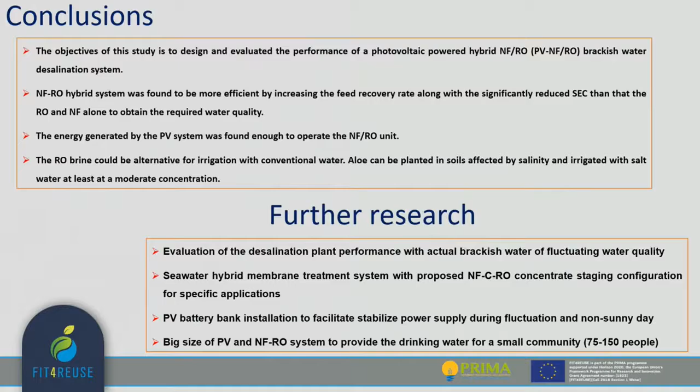As further work, they will evaluate this system with real brackish water and also real seawater for a specific application. They are also considering upscaling this system for a small community to provide drinking water.

Pilot B, the Mekorot pilot, is located in Israel. The aim of this pilot is to reduce the differential pressure of both the cartridge filter of the pretreatment and the RO, and as a result, to reduce the total energy consumption. This was done using two separate systems: the FRD, fouling reduction device, and a cartridge filter skid.

In this photo, you can see this system. The first one is our local pilot plant with 30 cubic meters per hour. From the photo and the scheme, you can see that we installed the FRD fouling reduction device in 3 places: at the inlet to the cartridge filter, at the inlet to the first stage, and at the inlet of the second stage, because we want to examine the effect on each stage.

These FRD devices are externally installed on the piping. The main mechanism is that it transmits an electric field into the pipe and the water, and is supposed to prevent precipitation of salts.

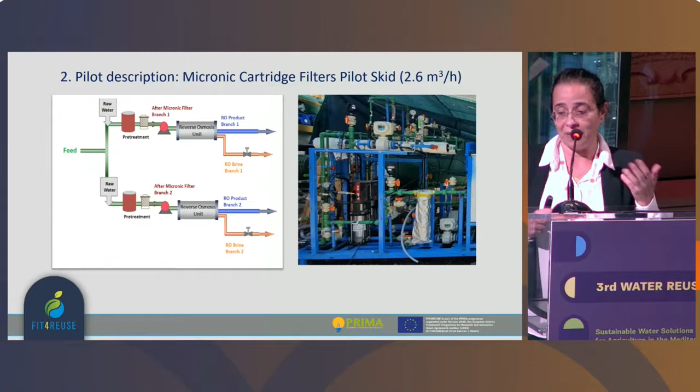The second system is the micronic cartridge filter. From the photo and the scheme, you can see that this system contains 2 branches to test different micronic filters in parallel. The aim is to obtain a cartridge filter that has a lower differential pressure, high particle removal to protect the RO membranes, and a long lifespan.

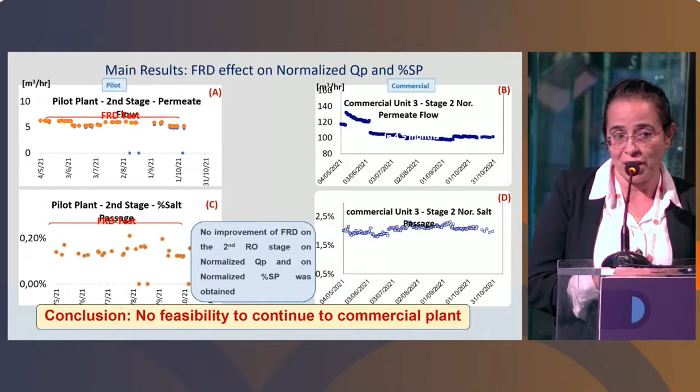This is the second stage results, where we expected to see the effect of this FRD. So the conclusion was that there is no feasibility to continue with the original plan to install this device in our commercial unit.

Pilot C, the brine management pilot, is also a Mekorot pilot located in Israel. The background for this pilot is three inland brackish water desalination plants, which are part of our Israeli coastal aquifer rehabilitation project.

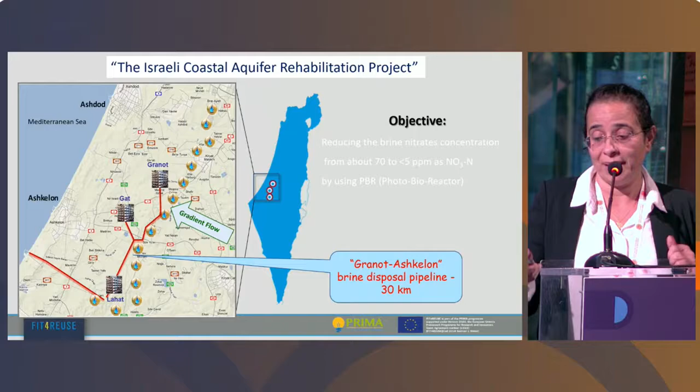And this brine contains about 70 ppm nitrate as N, and the regulation requires us to reduce it to less than 5 ppm as N, and we are aiming to do it by the PBR. The PBR, the one that you saw in the video message. I forgot to say that this PBR contains natural microalgae that generated from our brine.

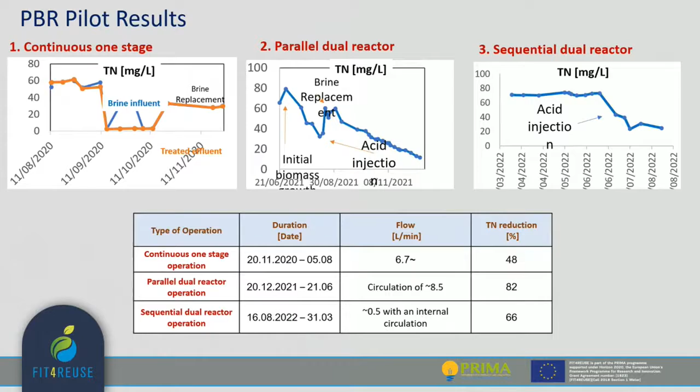And the results, here you can see the main results for the nitrate removal. On the left side, the continuous one stage, in the middle, the parallel dual reactor, and on the right side, the sequential. You can see that we obtain a reduction of the nitrate in the 3 operation modes. The total removal, as you can see in the table, is between 50 to 80%, where the best results were for the parallel dual reactor. In our further work, we are considering combining the parallel and the sequential in order to obtain the targeted value of less than 5 ppm as N.

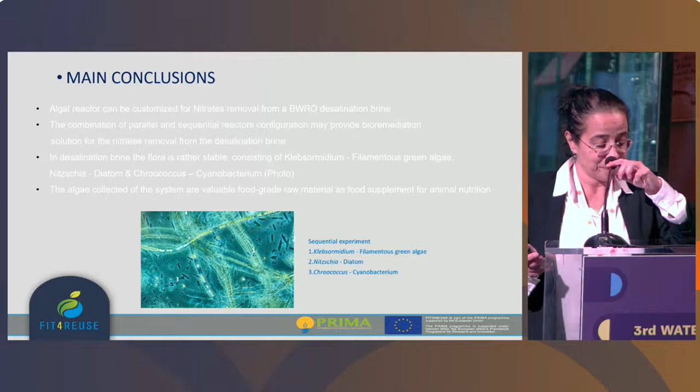So the main conclusion, this PBR photobioreactor can be customized for nitrate removal from the brackish water desalination plant. And with the combination of the parallel and sequential, we consider that we can obtain the target of less than 5. We also succeeded to characterize this microalgae, as you can see in the microscopic photo. We also did additional lab tests, and this biomass was found valuable as food grade and can be used as a raw material, as a food supplement for animal nutrition.

So the last pilot, the UniVPM brine management, this pilot is located in Tunisia. And the main aim of this pilot was to reduce the brine volume.

Sarit, apologies to interrupt, just try to make it quick so we can then proceed. This is the last pilot.

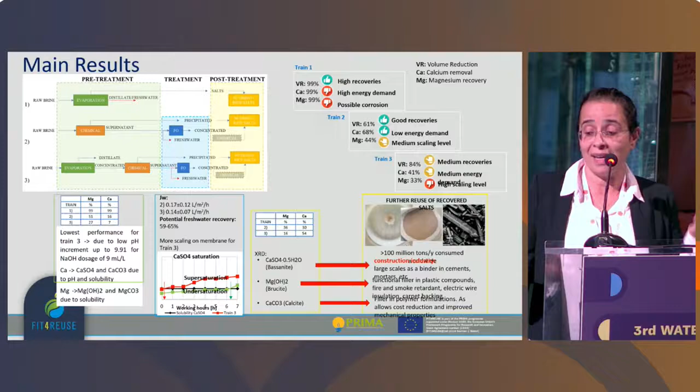And for the results, you can see train 1 with the thermal evaporation, high recovery of fresh water, calcium, and magnesium was obtained, but with high energy demand. Train number 2, good recoveries of fresh water, calcium, and magnesium obtained with low energy. Actually, it was the lowest energy compared to the other trains. And train number 3, medium recovery obtained, but with high scaling, due to supersaturation during the forward osmosis.

And importantly, the XRD indicated these 3 recovered salts, bassanite, brucite, and calcite, that you can see on the right side, that can be reused in various industries, the construction industry, the plastic industry, and so on.

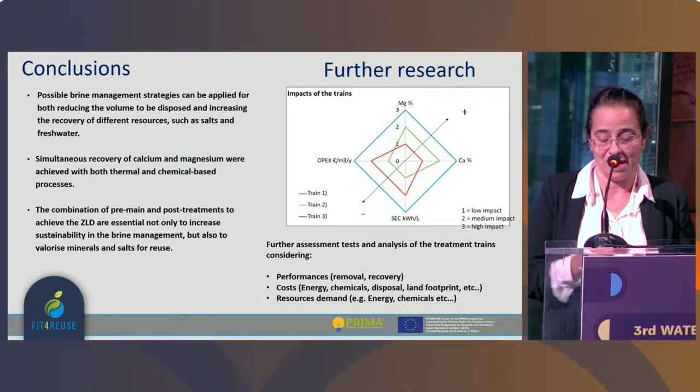And thank you very much. Thank you, Sarit. Well, we have been afraid of Francesco, but next time, Stevo, please keep an eye on Sarit. Apparently, she likes to have long presentations as well.

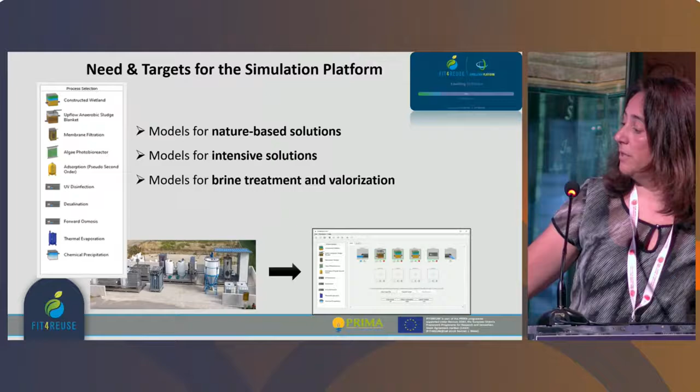So from all these very intensive site studies, we were successful in developing a simulation platform to predict the performance of these very valuable treatment options. And what are the capabilities of our simulation platform? First of all, we need the required treatment performance. But it's not only the conventional parameters; we also have to take care of the micropollutants and pathogens present in our effluents. So the platform is capable of simulating the performance of the treatment solutions for conventional parameters, emerging pollutants, and pathogens. We also have tools to evaluate the costs of the treatment trains by calculating energy consumption and carbon dioxide generation, to select the most suitable and sustainable treatment train.

So how are we going to use this simulation platform? It's really easy. First you should define your specific case. Which conventional or non-conventional water resource is going to be used? What is your target? Is it class A water we want? Is it class B? What are your regional environmental conditions? Are you going to work in hot climates or cold climates? And what are the regional regulatory compliances?

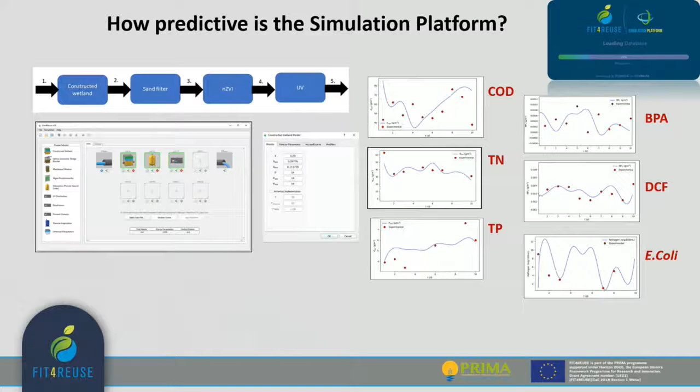These are some of the results. And you can see here the constructed wetland system with the NZVI column and UV disinfection in the end. And you see the conventional parameters like COD, total nitrogen, and total phosphorus can be very well simulated. In addition to that, we have the bisphenol A simulation, diclofenac, and E. coli simulation. That would give you the actual performance of the treatment train here.

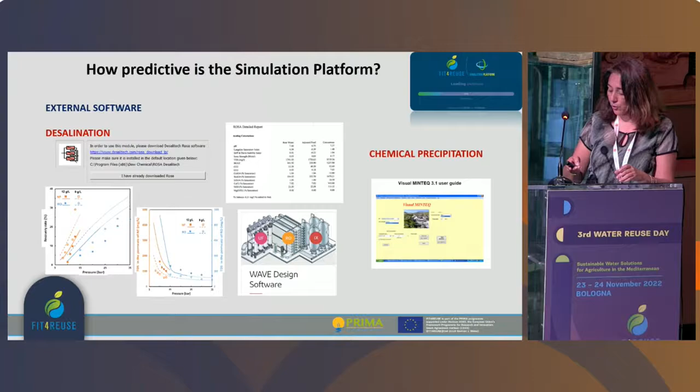So, for the desalination systems, as I have mentioned, we have made use of external software. So the simulation platform is capable of integrating any external software that's already present. And for the desalination systems, we have used ROSA software, and WAVE design software is also available if you want to use it. For the chemical precipitation, we use the Visual MINTEQ software, and these are some results from these external softwares for simulating the desalination systems.

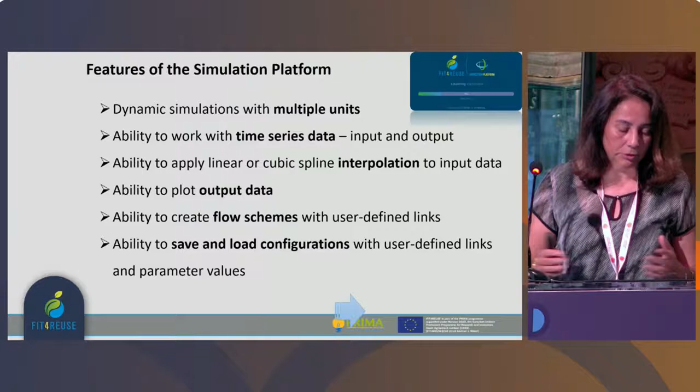So the features of the simulation platform, just to wrap up, we can handle dynamic simulations with multiple units, and we have the ability to work with time series. That means you don't need average data. If you have data for a year or two, we can work with it with the simulation platform, so you can go deeper in your decision-making process. And we can apply linear or cubic spline interpolation to the input data. If there is some time delay in your data, or some part of the data is missing, we can interpolate it so the program runs smoothly.

We can plot all the output data, as you have already seen. We have the ability to create flow schemes, so you can have parallel flows. You don't have to have a single line of treatment train, but we can also split your flows and then combine them if you want to run parallel systems. We have, of course, the ability to save and load configurations that you have already defined from your previous exercises with the simulation platform.

So, as I have mentioned, the simulation platform is really user-friendly. It has a simple graphical user interface, and it has a flexible architecture. And this is very important because this simulation platform can be further developed to include more technological solutions into the platform, so we can extend our solution library. And the efficient use of the simulation platform will, of course, reduce the need for specific case studies, at least for the beginning of the decision-making process.